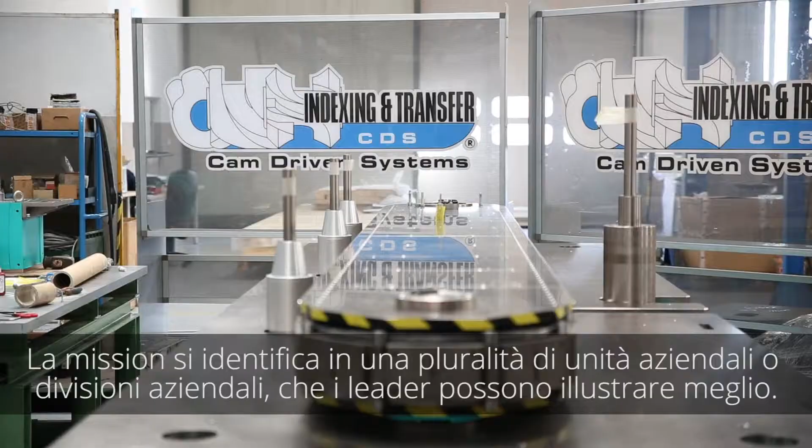The vision was to create a community of people with a strong culture focused on innovation and for the well-being of our great parterre of stakeholders. The mission is now identified in a plurality of business units or company divisions, which leaders can better illustrate.

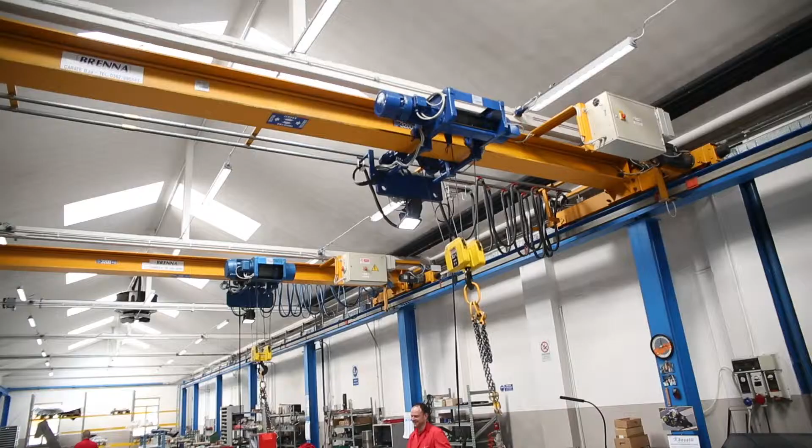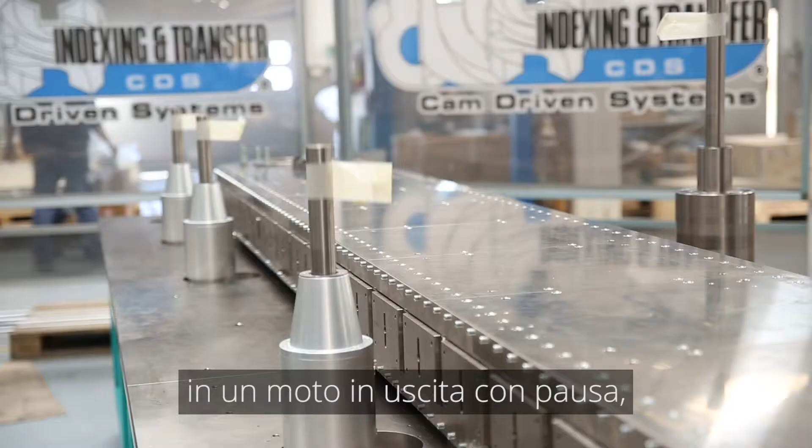CDS designs and manufactures mechanical cam systems for the world market. We transform a continuous rotary input motion into an output rotary motion with a stationary dwell built in a period, whilst the input remains constant rotary.

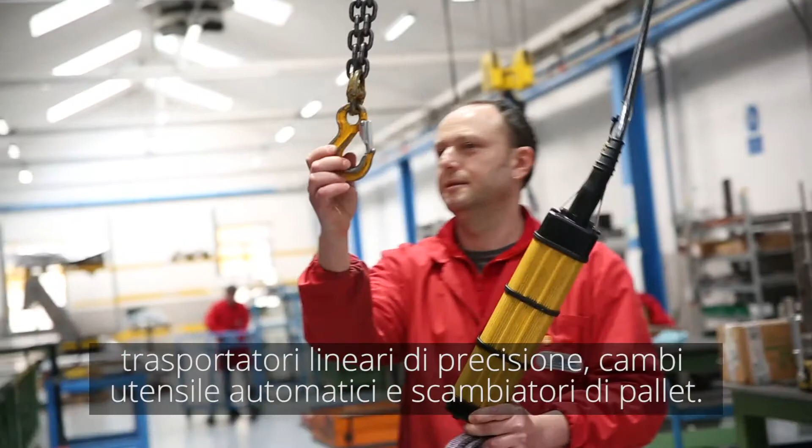Our main products are rotary tables, servo drive and positioner tables, servo pick and place, parallel shaft indexers, mechanical servo pick and places, high precision linear conveyors, automatic tool changers and pallet changers. We produce units from 50 millimeters up to 4 meters and can hold masses from a few kilos up to 10 tons.

The components produced by CDS also cover requirements of process automation, especially for assembly, inspection, filling, welding, and so on.

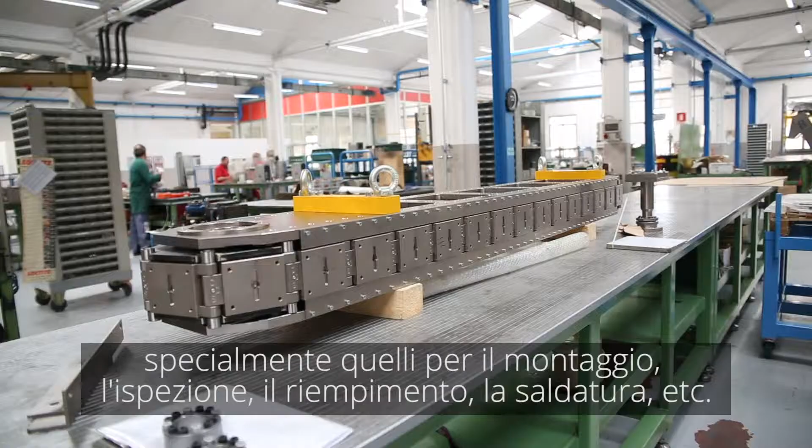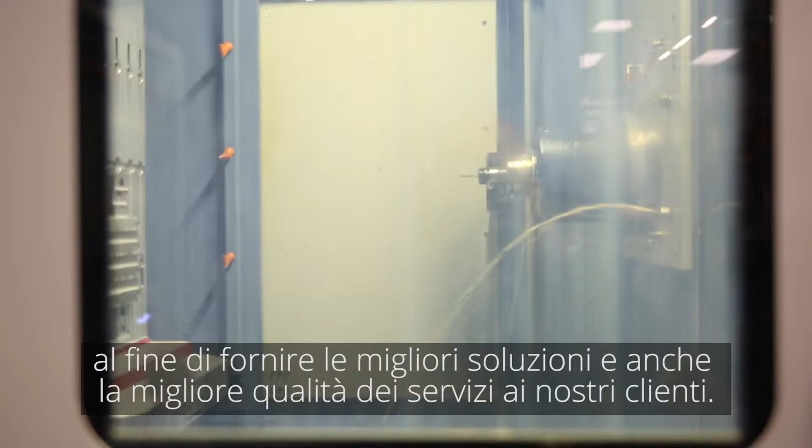More than 50% of our products are exported worldwide to countries such as Germany, France, Spain and the rest of Europe. We also supply America, especially the USA and Canada, and our target markets in Asia are China and India. We follow those markets directly with our subsidiaries, whilst other countries are managed through our agents or distributors, in order to provide the best solution and the best quality of service to our customers.

Our products can be equipped with a CAM solution that permits diagnostics, and the diagnostic data can be sent to the customer application and managed accordingly. Of course, we are continuously improving that product and the solution.

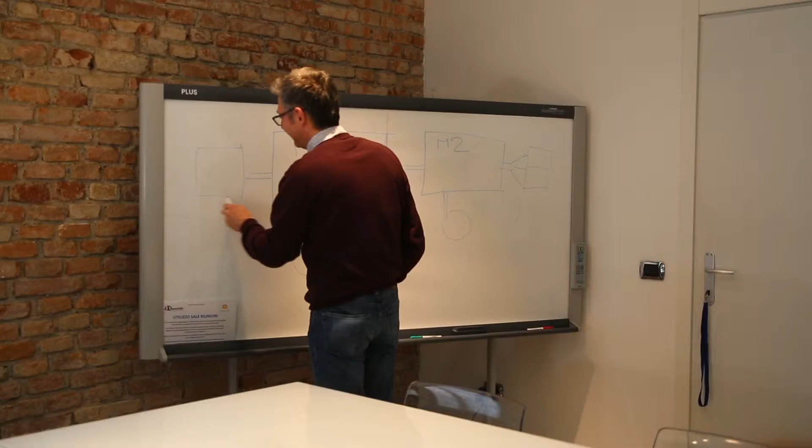Our company needed powerful and flexible CAD software to develop complex 3D models with thousands of parts and have full control over our projects using the most modern design technologies. We found the solution to our problems in PTC software, Creo Parametric and Windchill.

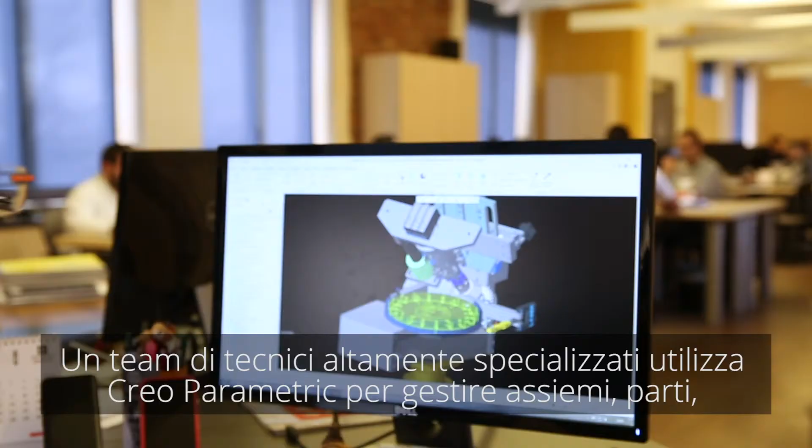A team of highly specialized people from the technical departments use Creo Parametric to manage assemblies, parts, drawings, sheet metals, bill of material, and static and dynamic simulations.

The simulation integrated in the CAD environment is very important because we can simulate a 3D model, modify it if necessary, and then simulate it again and see the results immediately.

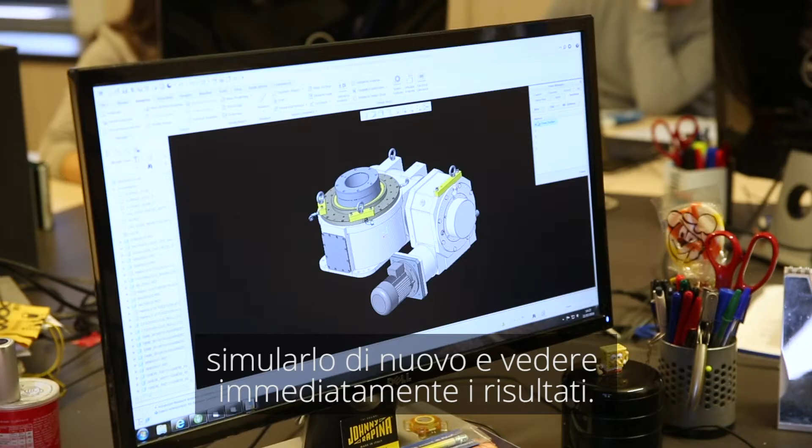We use Windchill to check all projects and share CAD data or other files with all company departments, to optimize information flow. With PTC solutions, we can check the design, reduce errors and reduce time to market.

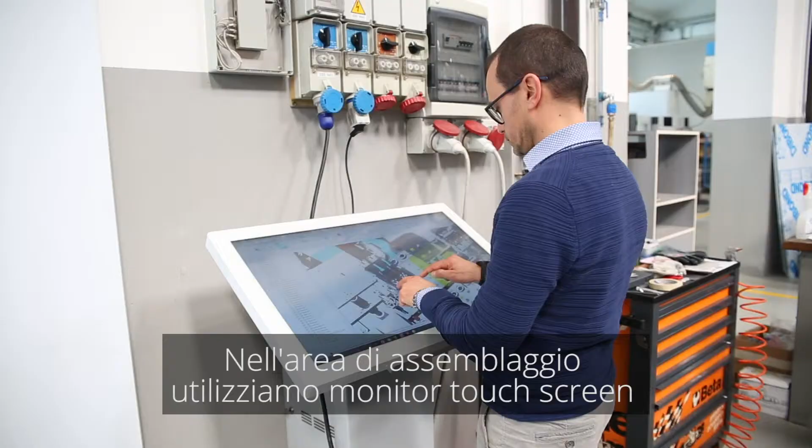In the assembly area, we use touchscreen monitors, and with Creo View software connected to Windchill, we can see the updated 3D models and perform assembly operations without paper drawings.

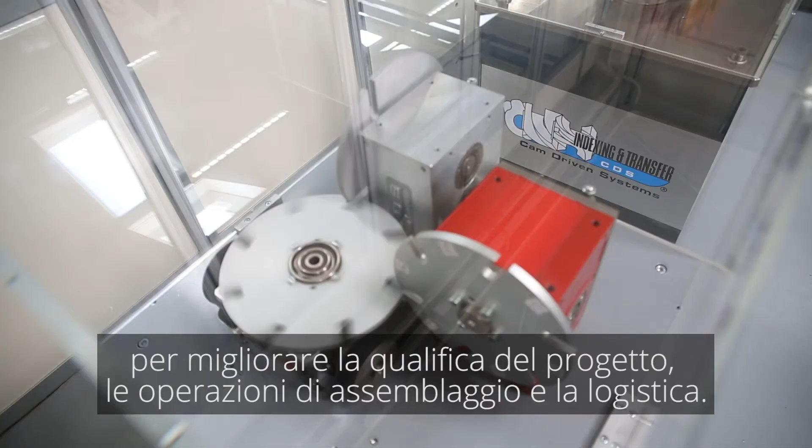Parametric Design is our technology advisor, who has followed us in our growth since the beginning. Soon, we want to develop augmented and virtual reality applications to improve design qualification, assembly operation, and logistics. With Parametric Design, we want to cooperate to investigate the opportunities of IoT technologies, as well as topology optimization and generative design for additive manufacturing.